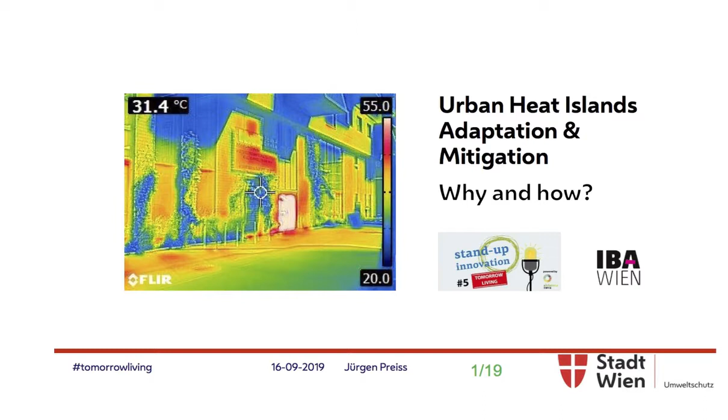What you see in the first picture is a thermal photograph. It gives information about how long-wave radiation is radiated from the building or surface. What is red is hot, white is very hot. What is blue is cold, and this gives an imagination of how urban structure affects how much energy gets emitted from the surface and the surface temperature.

Climate change and urban heat islands overlap. Altogether, climate change and urban heat islands have caused a change in the number of heat days inside the city of Vienna.

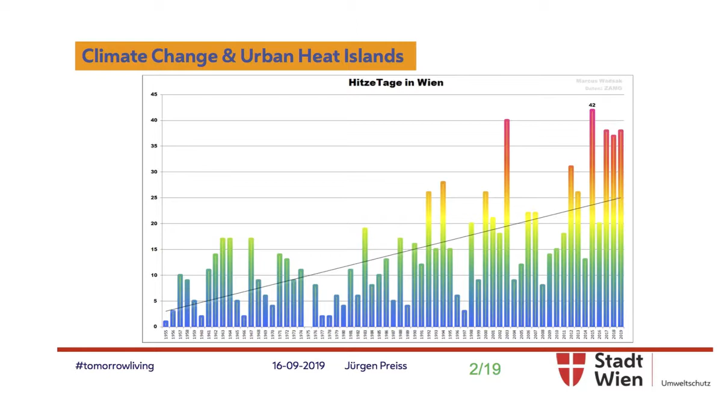The column from this year is missing - we'd be about here on the trend curve. So we're actually a little bit over the trend, but we're getting used to these heat waves, to years where we have 40 days with more than 30 degrees.

Why do we have this in Vienna? Almost because of the physics of the city's surface. This is again a thermal photograph, taken from an aircraft. You can see all what is yellow or red - these are very hot surfaces. All what is blue and green - these are cold surfaces.

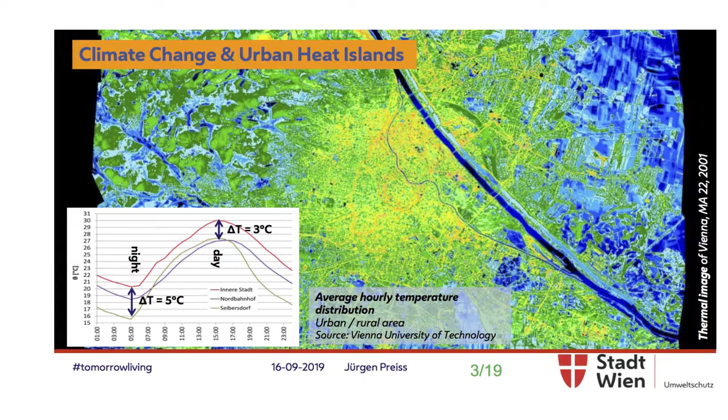Everywhere inside Vienna, it's calculated that the mean difference between inner city temperatures during daytime in summer is about 3 degrees, and during nighttime about 5 degrees. So this effect is more severe at night, because there's a lot of thermal mass - dense materials like concrete, brick, buildings - and these materials absorb sun energy during the day, store it, and release it during the night time.

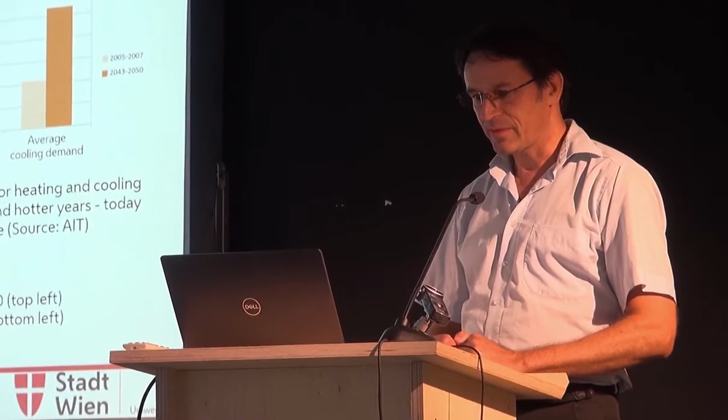Very crucial in this context is climate change. There are modellings here from ZAMG, the Meteorology Agency of Austria. They've done this model to find out how the number of summer days or heat days will change over a period of 100 years. You can see the picture top left - that shows how many summer days we have in this period, and how many we'll have from 2071 to 2100.

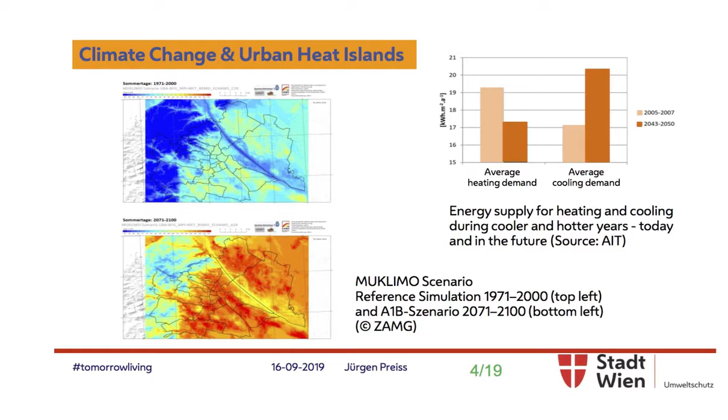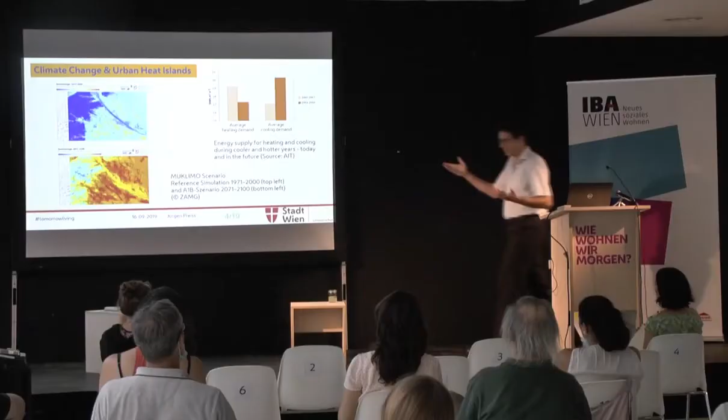That's a big problem, because if we're planning a building or a city part anywhere, we have to consider, right now, what happens when that building still stands at that future time.

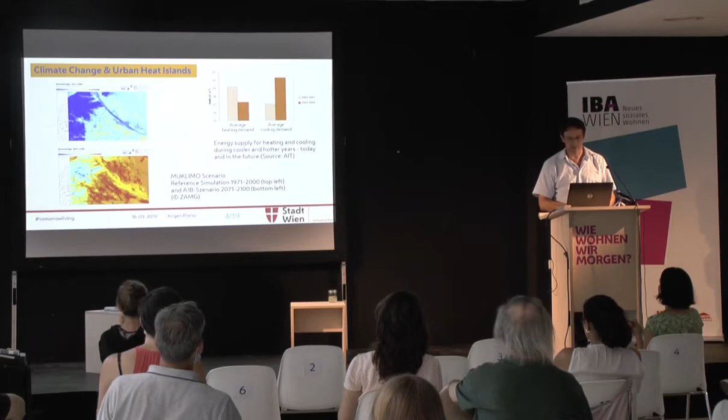On the right top there's a graph - an investigation from AIT about energy supply for heating and cooling during cooler and hotter years. The positive aspect is that heating demand in winter will sink, so we'll have lower heating demand, but the cooling demand will increase dramatically.

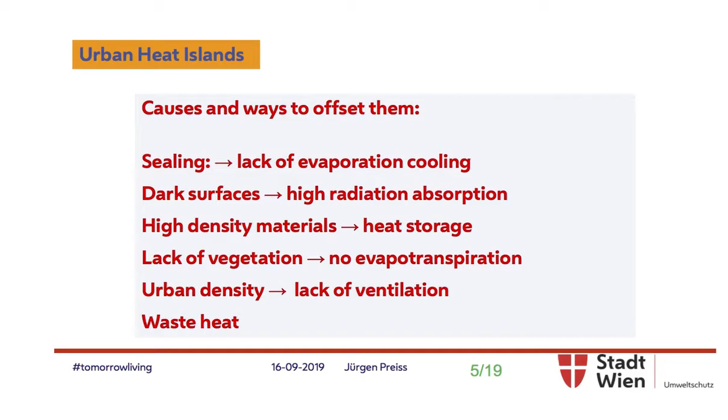Where we have sealing, water runs off, and we lose the cooling capacity of water on that area. Sealed areas are usually dense materials - they absorb sun energy, heat up, and store the energy. What we can do against it, of course, is desealing. Dark surfaces - sure, the darker the surface, the more it absorbs sunlight.

High density materials provide immense heat storage. Lack of vegetation means no evapotranspiration process. One square meter of a green area can evaporate up to 10 liters per square meter a day on hot days. So if we miss this, there is no transpiration, evaporation, and with that we lose the cooling effect.

Urban density brings the gray aspect of urban heat, which drives the urban heat islands. If you have very dense urban areas, you have less ventilation, which is very important for the city. In Vienna we're happy because we have the Danube area and generally west winds, which help cool down city parts. But there are sensitive parts where the Danube mainstream doesn't reach inner city areas. It's very important to care about this when developing city areas or doing planning.

The last point is waste heat, anthropogenic heat - all the heat which comes from engines, cars, air conditioning systems and so on. This is also very important in some small inner city courtyards where you have ventilation going outside. You can reach temperatures up to 70 degrees already, taking measures with that amount.

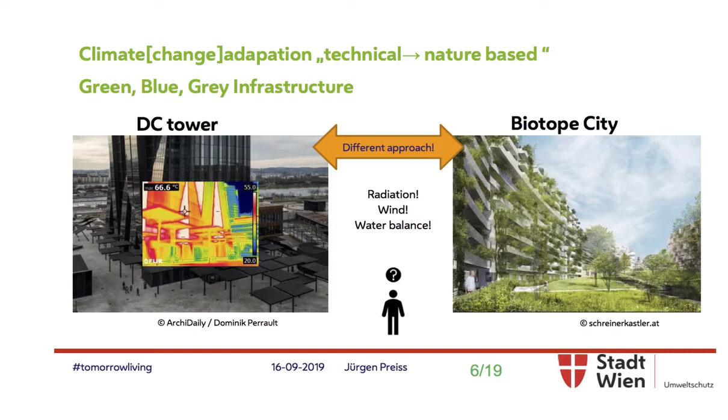We see the green and automatically we know this is something which helps us increase the comfort in this area. Everybody likes to have green in the surrounding. Vegetation and plants are very important for well-being and of course to regulate the climate situation.

What you have on the left side, the DC Tower, is missing all of what I told just before, and the result is very hot surfaces. You have no cooling effect from any water - there is no water, every bit goes down to the sewage system. You have shading, yes, but the prior issue for putting this shading there was not the shading effect. It was to protect this area from extreme wind speeds coming down from this black building.

The PET - I'll speak about it a bit later - and what are the driving factors of the PET. This is the physiological equivalent temperature. We have to think about this when doing city planning and putting measures in the city. It's what we feel, what each individual person thinks how he feels. Today we found some people did suffer from heat this year, some did not, so it's different - it depends on age, condition of persons, clothing, behavior and so on.

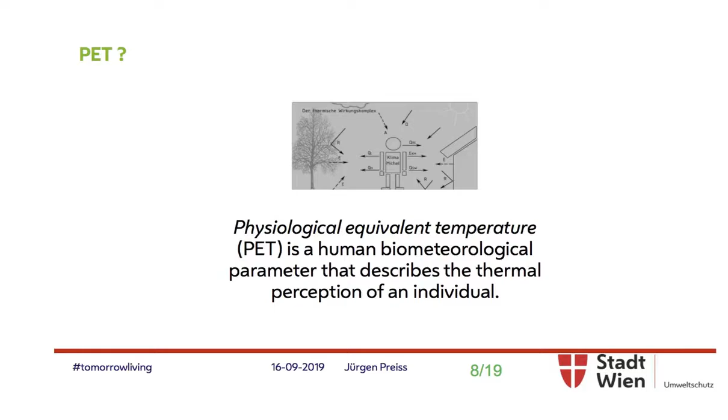So that's the so-called Klima Michel - he is influenced by a lot of radiation, air temperature, wind and so on. So it's just a definition of the physiological equivalent temperature. Very important to think about it when doing planning, whether you're a landscape architect or just an architect - it demands this.

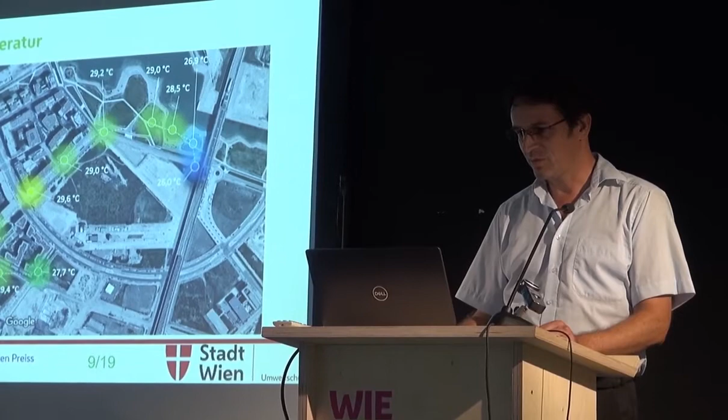It's very interesting when you go through a city, if you make experiences like we are doing sometimes. This was just a walk to find out how air temperature depends on the surrounding situation. This area has a very young aerial photograph. We started our walk at the underground station.

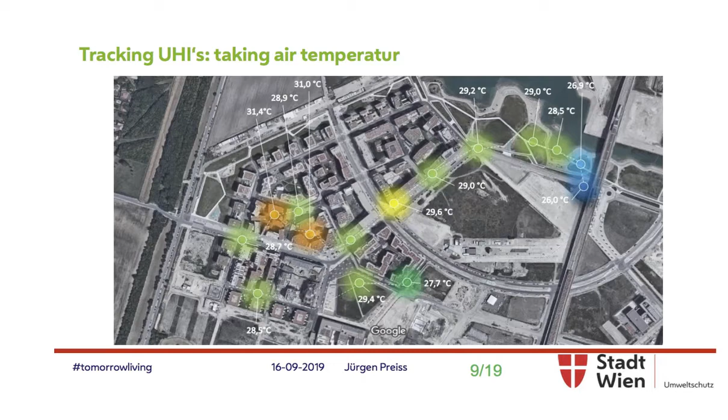This was interesting on a specific day. There was a range of air temperature, I would say 3-4 degrees, depending on the surrounding structure. So this is quite a lot, 3 degrees air temperature difference just within this part of the city. You can put it in correlation to all the aspects I told before, like green supply, other green surfaces, water. Obviously and possibly the first two blue spots are positively influenced by the Aspern Seestadt, by the lake there.

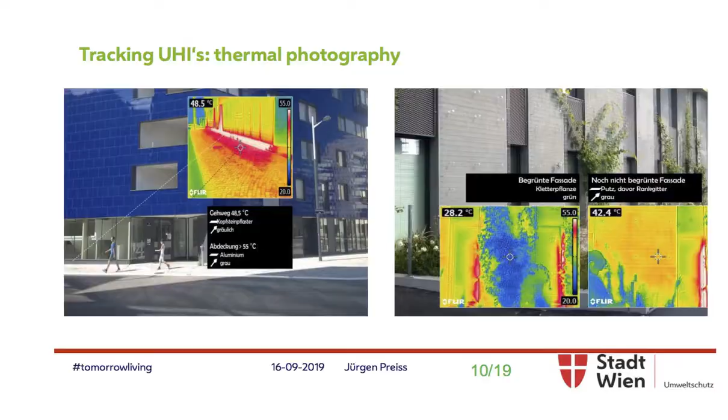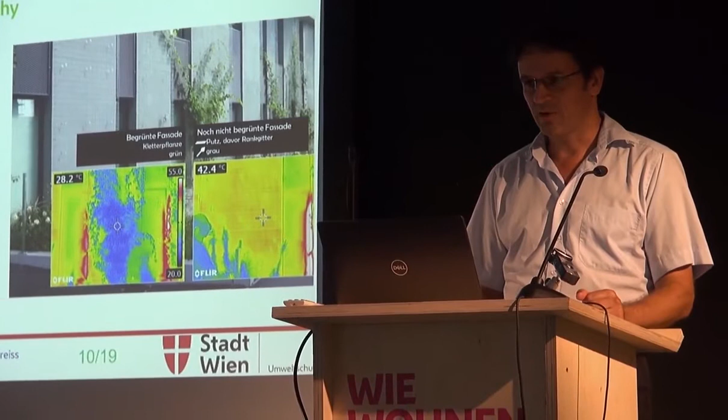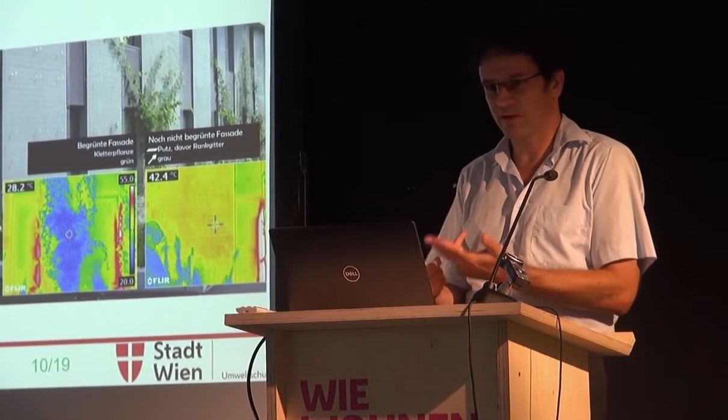If you walk around with a thermal camera, you get a lot of what we call AHA, a Eureka experience. You find out how surfaces behave and where there are really hot spots in the city. Very often pedestrian sidewalk lines along the line of the buildings are very problematic areas, so that's also the reason why greening facades is a very important topic to counteract this problem. What you have there is very often reflection from the facades, and this is maybe not the biggest problem. The bigger problem is that it reflects onto the surface, and depending on if there's asphalt, concrete or whatever, this material absorbs, and that's the part where it gets very hot, surface temperatures up to 60 degrees. But that's the space where children are very close to the surface, or little dogs walking there, and they might have real big problems with these temperatures.

The Urban Heat Island Strategy Plan is also available in English. I have some exemplars with me, I will put them out there. It contains 37 measures about, generally told, blue, green and grey infrastructures. I won't go into detail with all the possible measures you have to reduce heat in a city, but of course ventilation and linking of green space is very important if you are planning on a bigger scale. And it goes down to, of course, all green infrastructure, which is very important, greening and cooling of buildings.

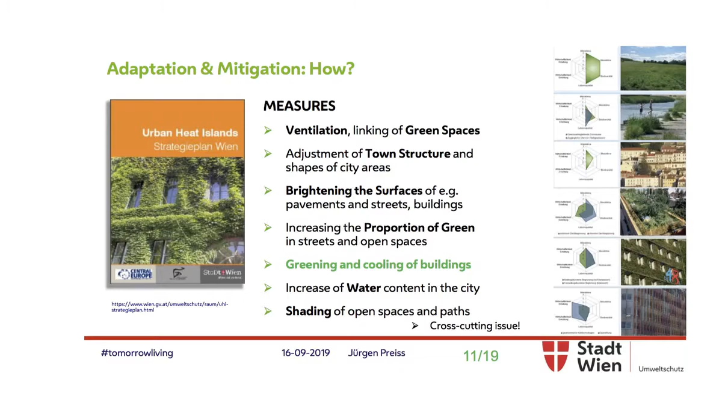That's a very exciting topic because it's a bit challenging. It's not like just planting a tree there. You have to consider a lot of criteria, how and what types of green to fit onto what types of buildings, walls, roofs and so on.

And very important is the description in the Urban Heat Island Strategy Plan about the other positive effects. So it's important to think holistic and not only about the cooling aspect, but also other meanings. What does the measure provide for biodiversity, rainwater management? How is the economical aspect, and very importantly, what's the social aspect?

If I make a white city, I have maybe a good effect - I can reflect the sunlight - but a white city is not really interesting for people. In America, they are painting streets white. It might be good to make a higher albedo on streets, but it could be uncomfortable to stay there. And especially white roofs are really senseless, because then it's only monofunctional and you don't have possibilities to use roofs for recreational issues or for rainwater issues.

Just adding measures to the city is good, but it's not enough. It's very important to find out what measure is really effective, and there are plenty of really good planning tools that help to find out the cost effectiveness, the cost benefit ratio. So you have costs - this is a project in the 11th district, a street, Aspang Street, which was a very hot street.

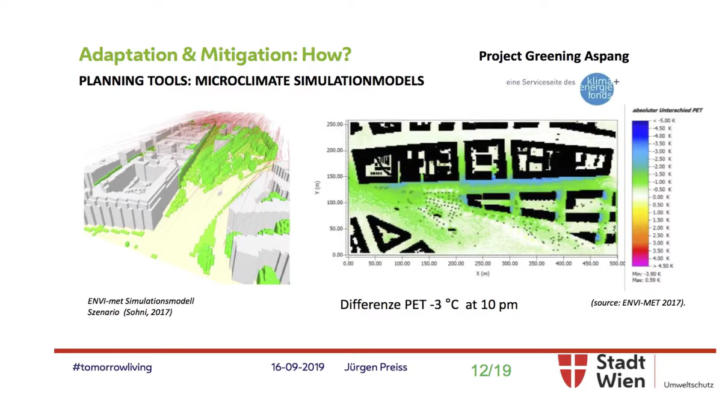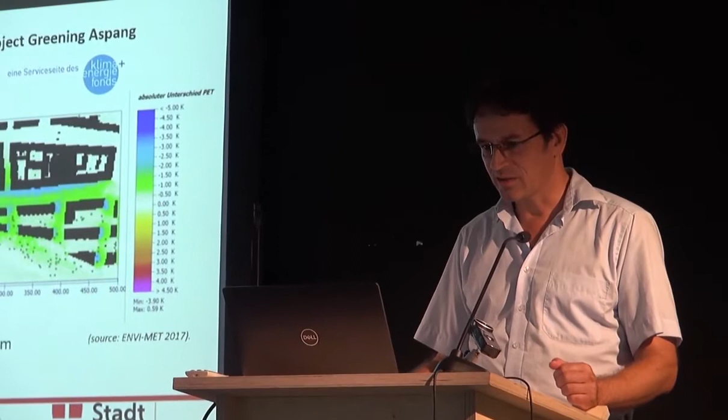The problem there was it's really expensive to plant trees there because there's a lot of infrastructure below. And the question was, what chances do we have with all the other measures we know? So greening facades, de-sealing, changing the albedo - this microclimate simulation model, this tool, helped us very much to find out how alternative possibilities can help to improve the situation in the public space.

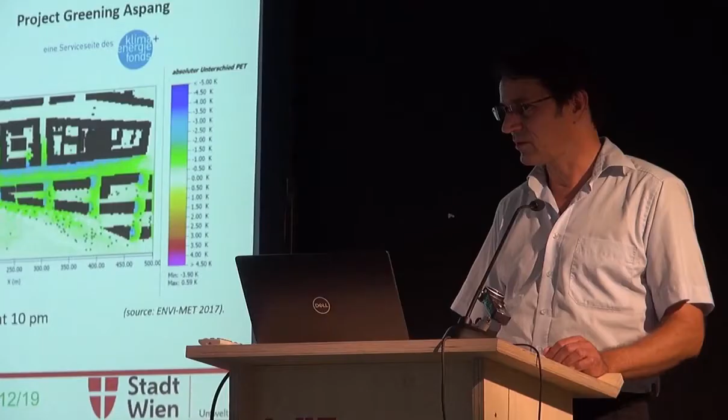And you see here a difference of 3 degrees at 10 o'clock p.m., so that's already night time, because of green facades. Just the green facades make quite an immense reduction of temperature in the surroundings. So that's the green colored space on the side of the building. The assumption was taken that 60% of the facades get a soil-related greening with climbers.

Information work is very important. We are working together with other departments. It's very important to provide good information work, to work together with external experts like Innovation Labor, Grünstattgrau. Vera Enzi will speak about it later.

One very important piece of information work is our recent guideline about greening facades. You can read about the meaning of green facades in general, about efforts and costs, about frequently asked questions, very important, but also botanical basics, technical basics, the systematics of facade greening, and a lot of best practice examples shown in there.

Vera, the challenge about what types of greening buildings need, soil-related, trough-related, or living walls, that's not so easy. So it's very important to include experts when doing planning. Don't just tell an architect to do any greening there; he can fail. It's a bit of a complex thing, but it's a very exciting learning process—what types of greening, what systems work well, and what systems are really appropriate for what types and situations of buildings.

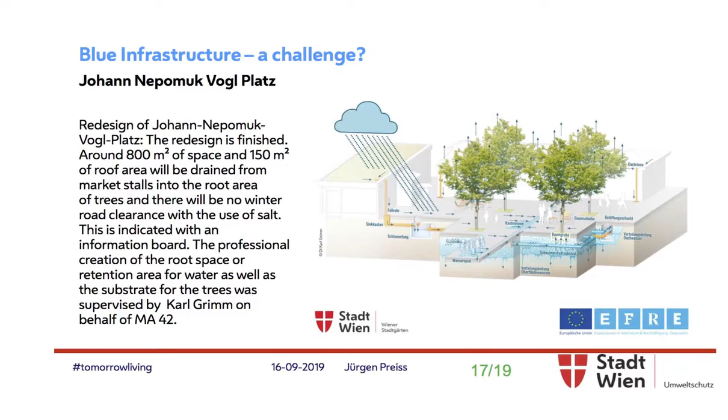Funding sources and information work—a lot of things are happening at the moment. We have promotions for private owners of buildings, for roof greening projects, for facade greening, and inner courtyard greening projects in this mentioned amount. So you can get up to 20,200 euros for green roofs, 5,200 euros for green facades.

On the street side, cities and districts get quite a lot of funding possibilities. There's the Kuhle Bezirk fund with 5.6 million euros, and there's also another 8 million for planting trees. This is very important because on the local level, districts very often have problems financing green infrastructure, but they are responsible for it at the end.

Subsidized housing gets funds for ecological measures. Information work is very important. ÖkoBusiness Wien is doing information work for businesses with an amount of 480 euros or more.

Then we have Umweltberatung Wien, that's an eco-counseling NPO. Umweltberatung does a lot of awareness-raising activities. They have a telephone hotline. Citizens can call them up, and if they have no idea, they get really good help.

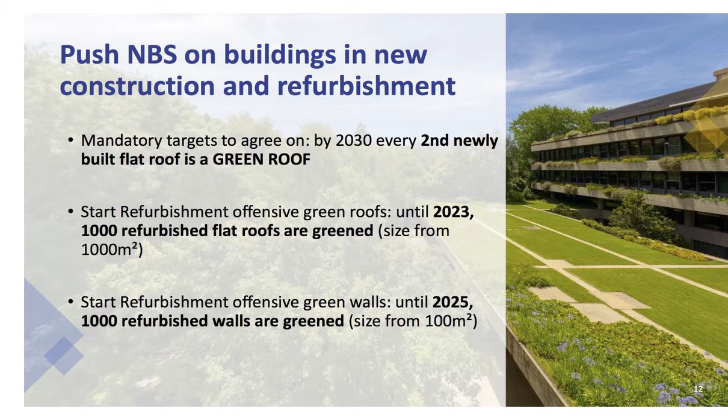On the other hand, urban green space has gotten a lot of attention over the last weeks, because this is green space people can use. If you cannot reach a public park and have to stay in your own building, plants around you get much more important than they actually were before. We could also implement this goal, until 2030 or 2023 already, into refurbishment processes, and not only in new buildings.

Welcome around the corner, you're invited to take a seat.

And there is actually a lot of different incentives and control measures we could go for. We could integrate this as a must-have part of the planning process at the moment, which is not the case. We could have a mandatory introduction of a green infrastructure indicator, so an investment or a house has to have a certain percentage of green. We could go towards energy billing or direct financial incentives, which I think was highlighted today already. I would also say that we could identify, across a lot of countries in Europe, a direct goal related to the unsealing and de-paving issue we have at the moment. We're sealing too much surface, and in Austria we're really at the top if you look at the European Union countries around us. We need not only to stop sealing immediately and start de-paving, we also really have to de-pave what's there already.

It's not just about setting measures for new buildings and building a lot of new buildings, but we have to focus on refurbishment and continuous unsealing and depaving of everything we've sealed until now. Goes for parking lots, goes for buildings. Take a look, a lot of possibilities. We have to do that, otherwise Austria is going to fail the next goal in terms of the sealing factor.

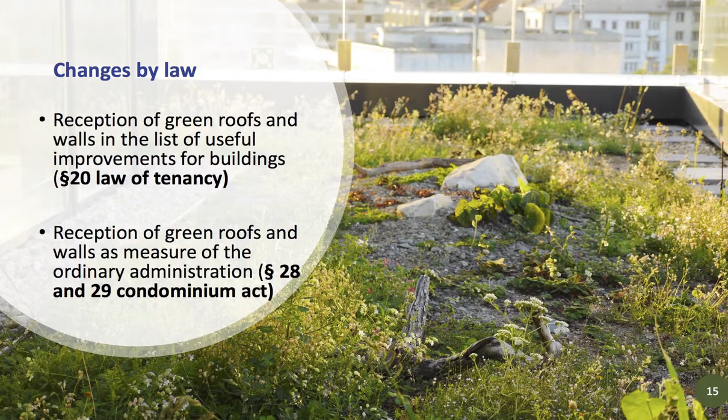Anyway, maybe also measures like that could help. And I won't go into detail, but there are also current situations, especially in buildings, not on the side of construction, but on the side of maintenance and operation of buildings. So there are certain laws of tenancy and the Condominium Act where greenery could be integrated, and then it's like kind of a standard process in maintaining our buildings. Because at the moment greenery is something which comes on top of maintenance a building has to have anyway, but it could be mainstream. Why not?

So in case you would be happy to discuss this issue with me further, if you're a company, if you're a city, if you're just a citizen who thinks on how he or she could contribute to the topic, you are the best one because you are the user. So I should have not said just, I should have said on top. If you are a citizen, you are super welcome. So this is the next chance to discuss the topic.

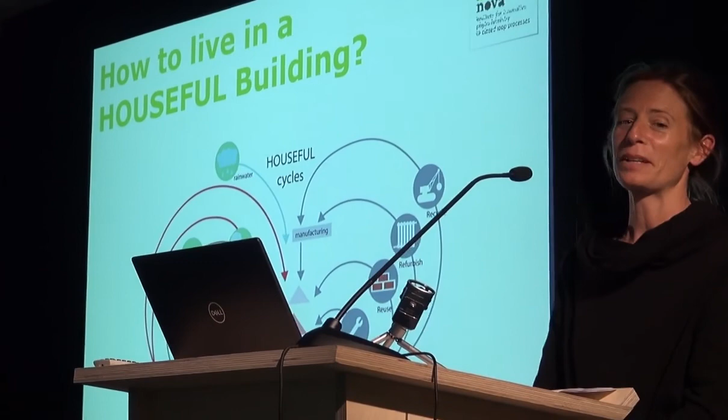When we got the positive answer from the European Commission that we can implement this Houseful project, all the European projects, there is a co-funding needed. They're really seldom fully financed. And then we found out about the IBA, and to be honest, we got it wrong. So Johannes and me, we went there, we dressed up, we tried to look really professional, and said, let's go there and go for 400,000 euros. So we entered the office, and we were really, so when were you talking about the money? And Kurt Hofstetter, he was offering, as he said, dissemination help, communication. At the beginning, we were a bit disappointed because this was not what we were asking for. But now, as we are here tonight, and as we can see how many nice other projects are in the IBA, we're really happy to be in this consortium and in this IBA project.

Yeah, thank you again. So I will present the Houseful project. That's about how to get circularity into existing buildings. We have 4 demo sites, 2 in Austria, 2 in Spain. Actually, there are 3 in Austria. We started with 2, now we go with 3. And we have so many goals in this project, but I will really try to keep it short.

On the right part of the picture, you can see whatever is technically feasible with the construction material. So how to get buildings set up, how to get them down again, how to dismantle them, how to recycle materials. I will not talk so much about this part. We'll talk about the other part on the left side of the picture, and these are all the organic materials that we can recycle with the plants. So it's nature-based solutions. It's not just greening, we call it functional greening. Of course, we have heard that greening has so many effects and so many impacts, but greening can even do more than that.

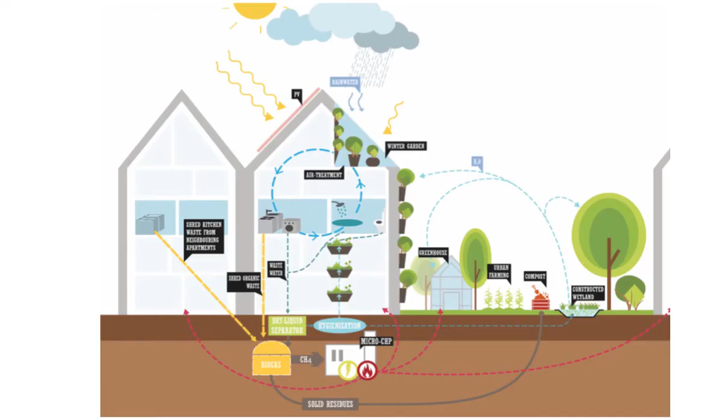And now there's a very complicated picture coming. This is what we try to do, just very short. We have in our wastewater a lot of organic substances. That's feces, that's urine, that's toilet paper, it's also somehow organic. But in Houseful, in the Austrian buildings, we already start with implementations. We also shred our organic kitchen waste and put it in our wastewater, so we have a really enriched wastewater.

What we then try to do is we separate the solids and the liquid parts from this wastewater, because then we can treat them efficiently. All the solid parts, so the organic kitchen waste, the feces, the toilet paper, they go into a biogas system that is made for a household size, so it's a really small one. We can treat it there, we can get cooking gas out of it, and the residues go into a special composting unit to compost residues from the biogas unit, so it's not getting really full of odors that you might not want to have. Everything is turned into fertilizer at the end.

And then what we want to do is direct local food production on site with the organic waste. Once waste, now it's nutrients. All the liquid part is going into vertical constructed wetlands that we have inside the building and outside on the facade roof. You can see both of them tonight. The inside module is in one of those rooms there, and the outside system is on the Mugli that we're going to see afterwards.